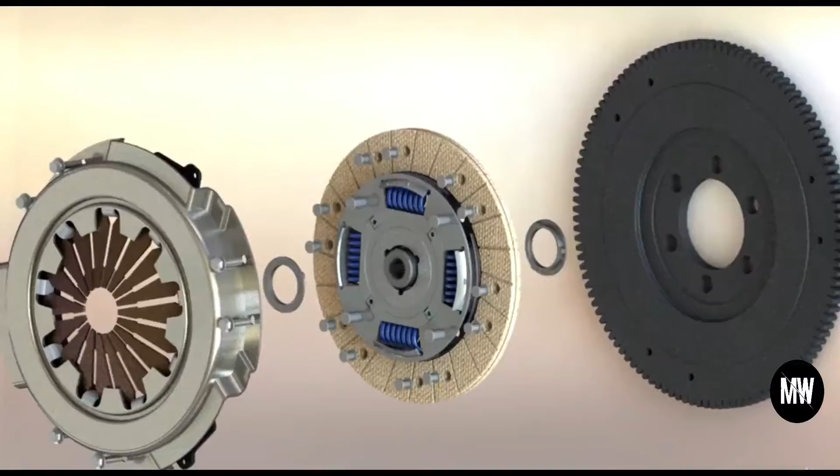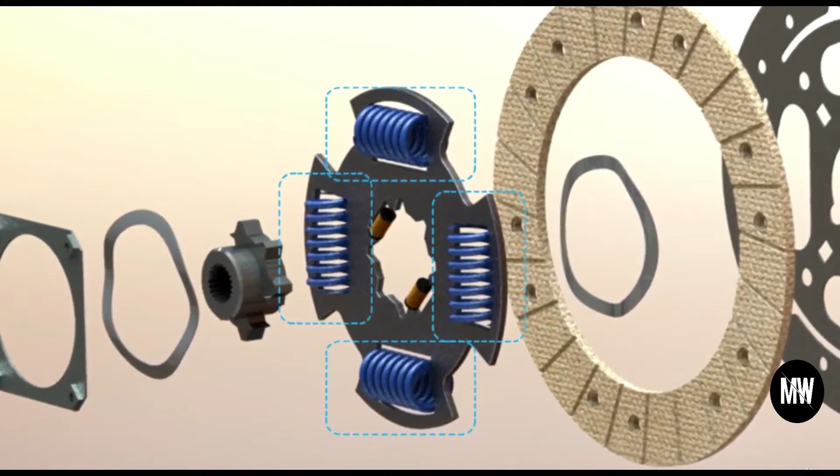In this one we are going to build the 8th part of the clutch system, which is called the damper spring. Actually it is a good exercise because we are going to use a feature called the sweep, and it is really an interesting feature to use, and the sketches used on this feature are very simple. So we are going to create this part here on the picture, and this is how it looks in the clutch system. So let's begin by creating a new file and select the part design.

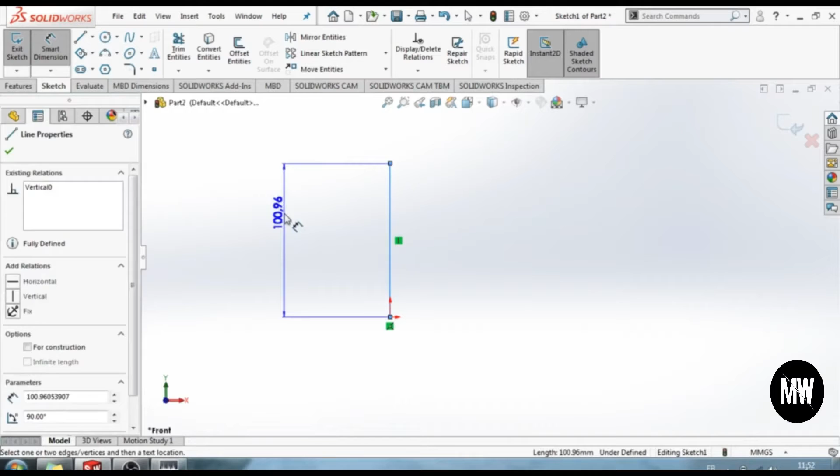Here I will select the front plane again, and let's begin our sketching. So here on this first sketch, all we need is a line. So I'm going to select a line here, and the dimension of this line is 43. That's all we need for the first sketch. Now we can exit the sketch, click on escape to deselect the sketch here, and then click on sketch again and choose the front plane.

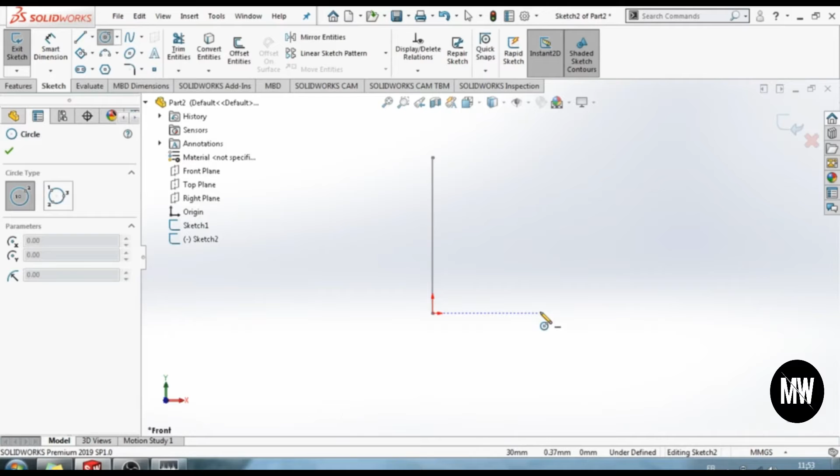For this second sketch we need a circle, so let's create a circle here. Make sure the center of the circle is on this axis here, and the diameter of this circle is just 3. The distance between the center of the circle and the line is 8. And that's all we need for the second sketch. So as you can see, sketches used on the sweep are very easy, which means the feature is really interesting.

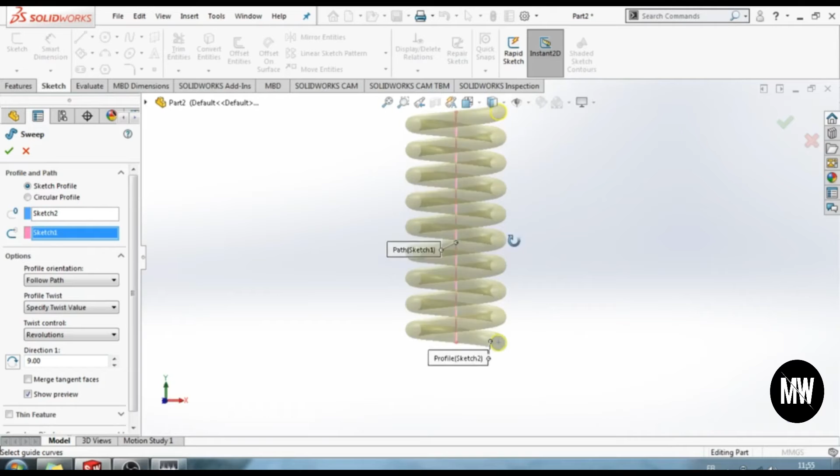So let's use the sweep feature here on insert, boss, sweep, and the first sketch here to select is the circle, and the second one is the line. Click here on options, and let's change the profile twist here to specify twist value, and change the twist control here from degrees to revolutions. And here on the direction, let's give it a 9. And here, as you can see on the preview, we have the form of the spring. Now click OK.

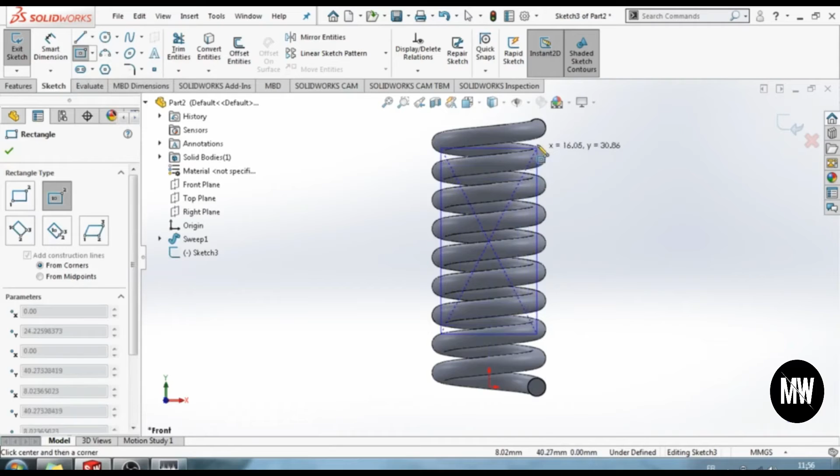Perfect. Now we need a cut extrude to finish our spring, so let's begin sketching again. I will select the front plane here, and let's build a center rectangle. Make sure the center is on this axis here. Let's select a big rectangle like that. So the distance between the last line of the rectangle and this point here is just 1 millimeter. Here we have 34.4, and here we have 20.

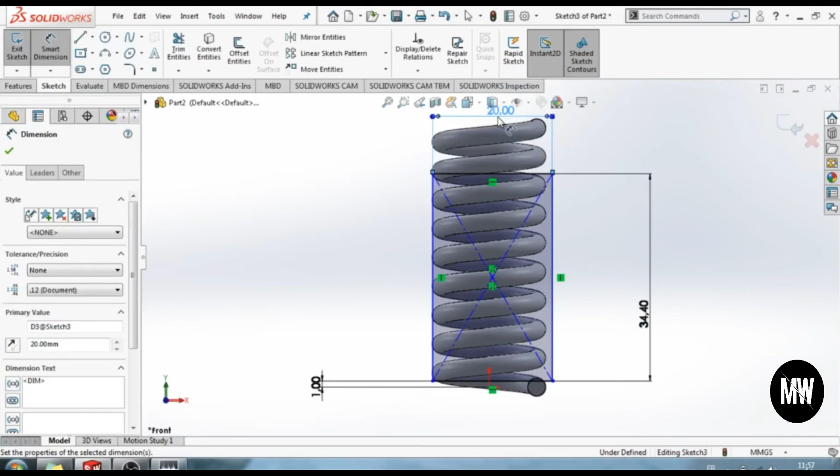Let's build a center line to get the symmetric relation. Now click on this line and this one with the center line, and click on symmetric relation. Click OK, and now we can exit the sketch. Here let's use the extruded cut, and I'll change here from blind to mid plane to get the cut in the 2 directions.

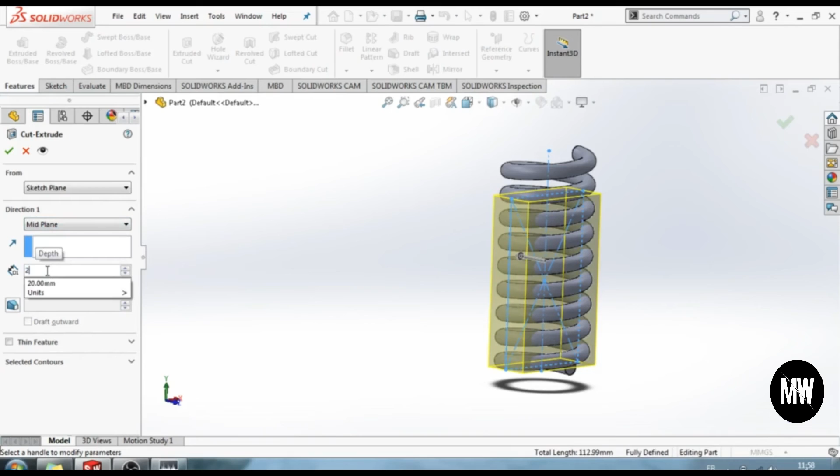For the depth here, let's give it a 25, and then click flip side to cut, because I want to keep the form inside this cube here, and I want to delete everything which is not in this cube. So click OK, and as you can see, we got the exact form of the spring that we need. And that's all about the 8th part of the clutch system.

In the next video we are going to see how to create the hub damping spring. So we will use the sweep feature again to repeat the exercise, and see you in the next video.